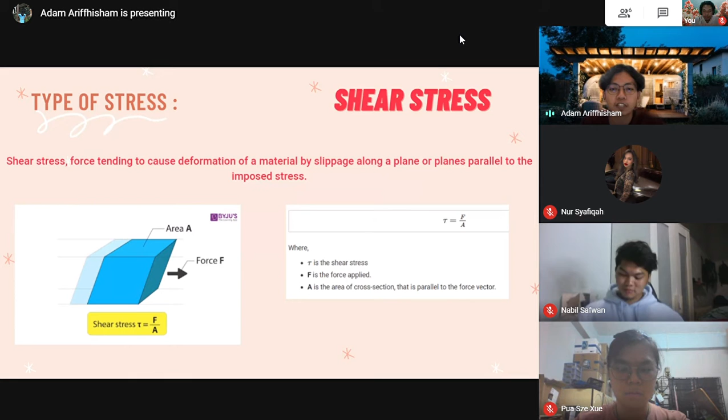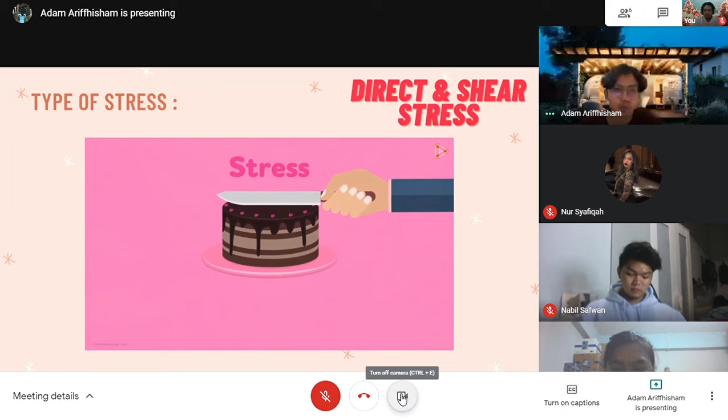What really happens when we cut a cake using a knife? In physics, we could say that the cake experiences stress. Usually when we cut a cake, we hold the knife straight and apply the force on this area. So normal stress, as the force is acting perpendicular to this area.

But what about these cross-sectional areas of the cake? The area on top is not the only area that experiences stress. As we pierce the knife in, this cross-sectional area experiences stress too. It doesn't look too obvious, but it does experience stress. We can also see that the force is not perpendicular to this area. It acts parallel to it as we are pushing the knife straight down.

If the force acts parallel to the surface, it exerts shear stress. This stress tries to push the two surfaces away from each other and hence results in plastic deformation. So this is the basic difference between normal stress and shear stress. Normal stress is where the force is acting perpendicular to the area of contact, while shear stress is the force that acts parallel to the area.

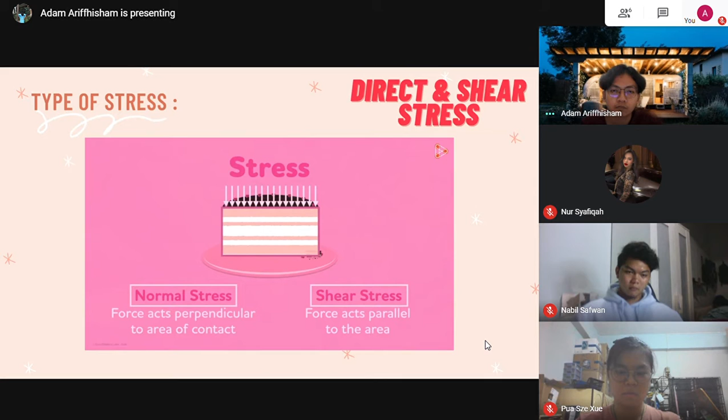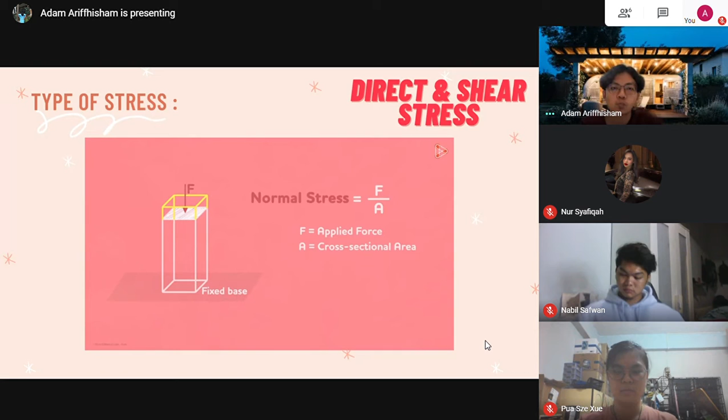Let's take another example which explains shear stress better. Here's a beam and assume that it's fixed at its base. If we apply normal force to this cross-sectional area, then we know that the stress experienced by the beam will be normal stress, which is simply given by F over A, where F is the applied force and A is this cross-sectional area. This will result in a normal strain in the beam, which is given by delta L over L, where delta L is the change in length and L is the original length.

Now suppose that we apply a force in this direction, parallel to area A. Again, the beam will experience some stress, but this time it will be a shear stress. The equation or formula for shear stress is the same as that of normal stress. Stress is simply the applied force per unit area, whether it's acting perpendicular or parallel to the area. What about the deformation in the beam by shear force? Here the deformation will be something like this. The object is stretched to some extent.

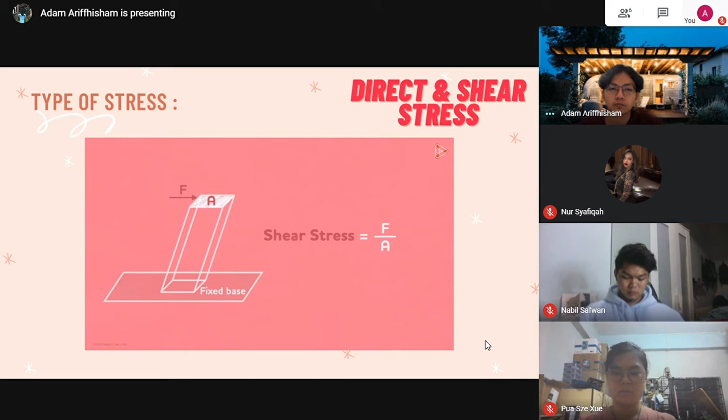Note that the beam is fixed to the base, so this cross-sectional surface will remain where it is, whereas the cross-sections above it will all get displaced to the right by increasing amounts. Now look at the maximum displacement here. Let's call it delta x. We know that this length is L. It's perpendicular to this. Also notice that there's an angle formed here. We can call it theta.

With this information in place, let us define what shear strain is. Shear strain is simply equal to tangent of theta. Yes, shear strain is simply the tangent of this angle. But what is tan theta? We know that it's the opposite side over the adjacent side. Here, the length of the opposite side of theta is delta x and length of adjacent side is L. So it's equal to delta x over L. So that's how shear strain is defined: length of the deformation at its maximum over this perpendicular length.

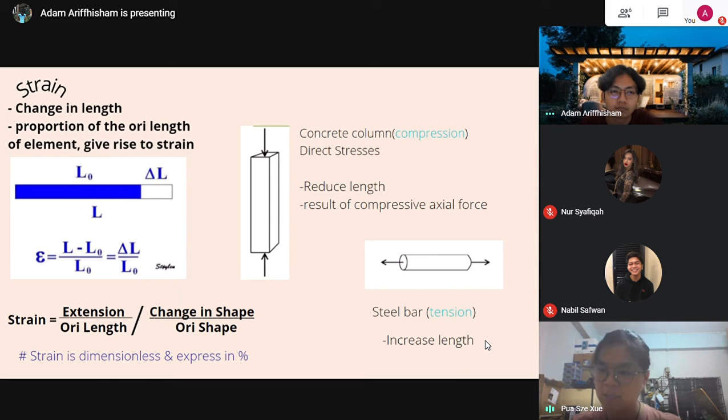Tensile stress can be explained as when a section is subjected to two equal and opposite pulls, as a result of which the body tends to lengthen. You can see as shown in the figure, it tends to lengthen. You can see the arrow showing the direction of the force. The stress induced in this particular body is called the tensile stress. So this is the result of the tensile stress.

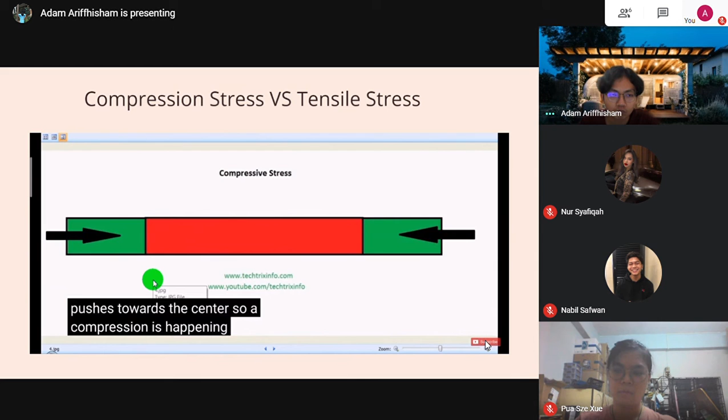So a compression is happening to the particular member. Finally we obtain a bar of this stage with less length. So the stress induced in this body is called the compressive stress.